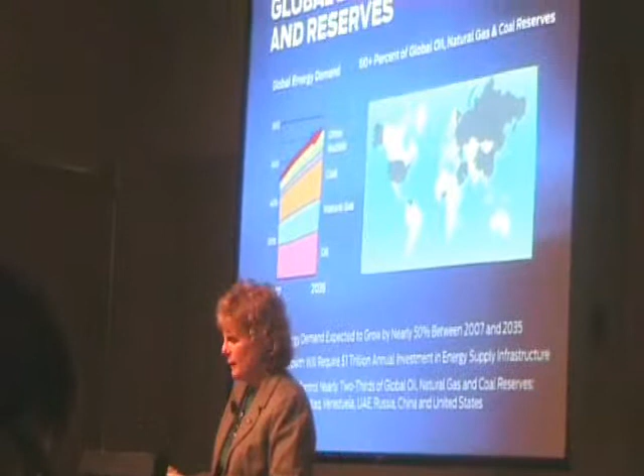And I want to ground everybody in terms of what this is all about. The world's appetite for energy is expected to grow by nearly 50% over the next 25 years. And that's going to require an annual investment of more than $1 trillion to expand the energy infrastructure. So that's something you don't really hear much about. We all know that the energy demand is increasing, but the infrastructure to support it isn't there, and there's going to be huge investments to make that happen.

Compounding this challenge is the concern that nearly two-thirds of the world's oil, natural gas, and coal reserves are located in just 8 countries: Saudi Arabia, Iran, Iraq, Venezuela, UAE, Russia, China, and the United States. So meeting this growth will require free and flowing markets. And of primary concern is that a slowdown in energy investment, to invest in the infrastructure, similar to what was experienced over the last couple of years in terms of all our financial markets and everything else, could really constrain the energy supply and hinder economic growth and reduce access to energy by low-income households. So unless the spending is done, we might not be able to get the energy where it needs to be.

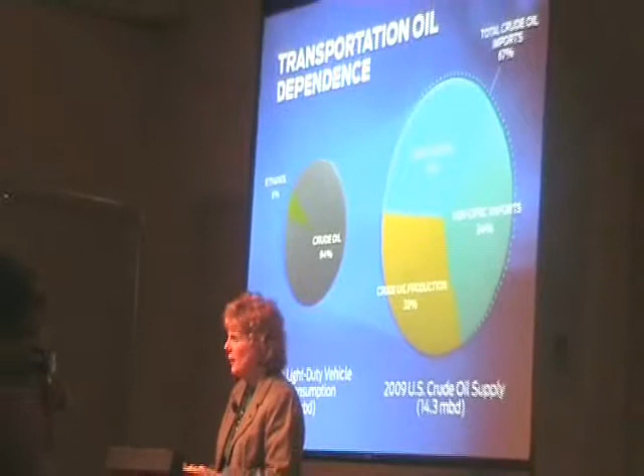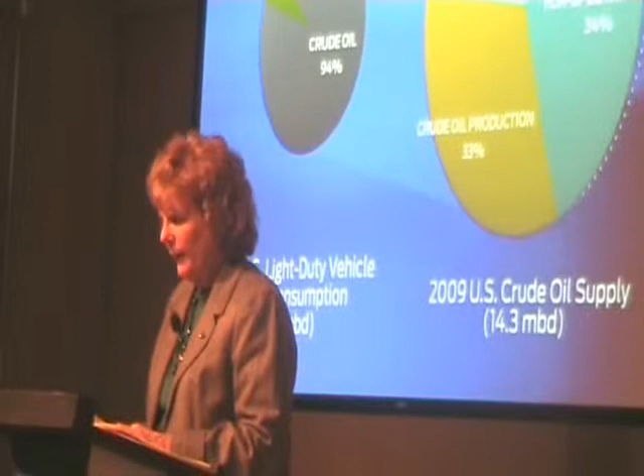So not surprisingly, the concerns over energy security often focus on the role of the transportation sector. So on the next slide here, we have what transportation oil dependence looks like. In 2009, more than 94% of the energy that was used to move light-duty vehicles across the U.S. came from crude oil, and a third of that was imported from OPEC. So globally, nearly 1 billion cars consume about half of the world's oil supply, and the OPEC countries control more than 70% of the global oil resources.

Automobiles are particularly susceptible to energy supply disruptions and oil price volatility because of the transportation sector dependence—it's really a factor in our business. So when we see the prices of fuel fluctuate, we see our sales fluctuate. Either people are trying to buy more fuel-efficient vehicles or they're less concerned about that. With those kind of numbers, it's easy to see why we're so focused on improving the fuel efficiency of our vehicles around the world.

Better fuel efficiency and alternative forms of energy, like electric power, can really make an impact on decreasing the global need for oil. That's why we've introduced the EcoBoost engine, which improved fuel efficiency by as much as 20% and decreased CO2 emissions by 15% versus our larger displacement engines, without sacrificing any performance.

And that's why we offer the EcoNetics technology. This is a collection of features designed to help customers equip their cars with technical equipment specifically aimed at greener and more fuel-efficient motoring. Features such as the Ford Eco Mode and the Smart Regenerative Charging have been introduced widely in Ford products. And that's why we're introducing a family of electrified vehicles, including hybrids, plug-in hybrids, and pure battery electric vehicles, as you heard us announce yesterday at the Auto Show news conference.

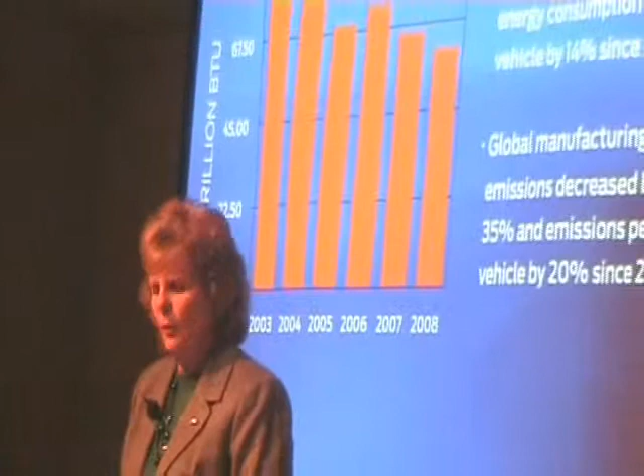And so while increasing our fuel efficiency in our product lineup will also have a large impact on energy, we're also mindful of the need to reduce energy use in the production of these vehicles. Since 2003, global energy consumption in our facilities has decreased by 29% in total and by 14% per vehicle produced. You can say, oh yeah, sure, your energy use went down, but you're making less vehicles than you used to make. We also look at the metric on a per unit basis, and so we've also driven that down. And when you consider our annual energy cost exceeded $600 million, these savings are quite significant to both the bottom line as well as to the environment.

So the added benefit is that by reducing the energy use, we've also reduced CO2 emissions by 20% since 2003, on a per vehicle basis.

But energy is not the only environmental concern we're faced with. When we talk about the need to conserve resources, we also need to consider the global concerns over water in terms of both availability and quality. I believe this is going to be the next really serious challenge. We've all been focused on CO2, but we know today 1.2 billion people globally have no access to clean water. Global water consumption has been increasing at more than twice the rate of human population growth, and that's set to triple in the next 50 years. So at this rate, the world will be using over 90% of all available fresh water within 25 years, which is just really a shocking statistic.

So globally, many regions will likely be subject to peak water, and that's the point at which the rate that water resources are being consumed is higher than the rate at which the supply is being replenished. So the energy intensity of water is also going to increase, owing to declining water quality and an increase in the distance that we're going to have to move the water from where the source is to where consumption is.

So it's clear that addressing the water challenge will require innovation and commitment. That's why at Ford we've joined the Water Disclosure Project and why we have our own water management initiative to focus on water conservation in all of our facilities and processes worldwide. It's going to take innovative solutions to deal with the water issue, which touches economic, environmental, and social concerns as well. In 2000, Bill Ford announced Ford's Global Water Management Initiative with a target of a 3% year-over-year reduction in water use.

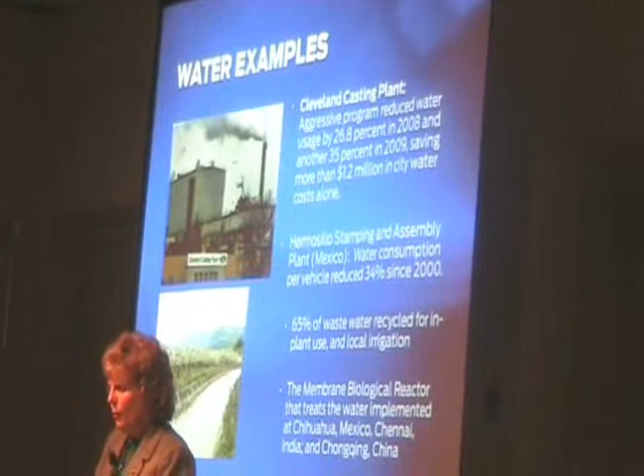We're implementing projects at our facilities to reduce their impact on water as well. For example, at our Cleveland casting plant, where we produce our EcoBoost engine, we have an aggressive program to reduce water usage that resulted in a 26% reduction in 2008 and another 35% reduction in 2009, saving more than $1.2 million in city water costs.

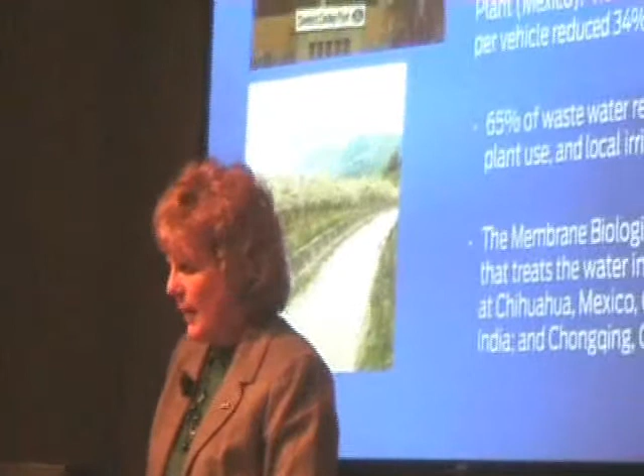And at our Hermosillo stamping and assembly plant in Mexico, water consumption per vehicle has been reduced 34% since 2000, with 65% of wastewater being recycled for in-plant use and local irrigation.

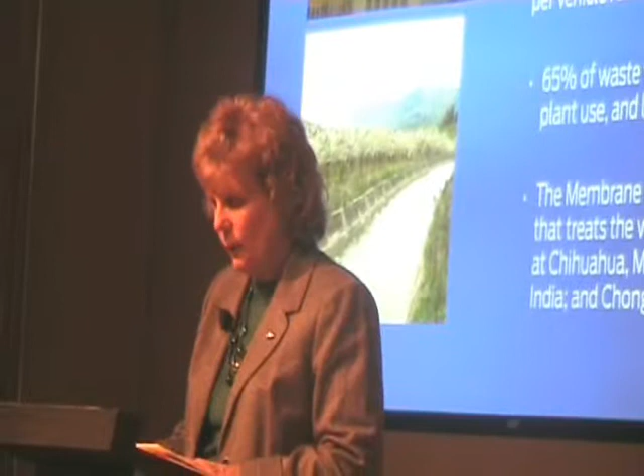This was really important to us because when we came into this area, it's pretty much a desert region, and we put in an assembly plant, which people loved because they wanted the jobs. But we were taking a lot of the water away from the people, and we said, we want to double our production—what are we going to do about the water supply? So this is the balance we have with the social, the financial, and the environmental.

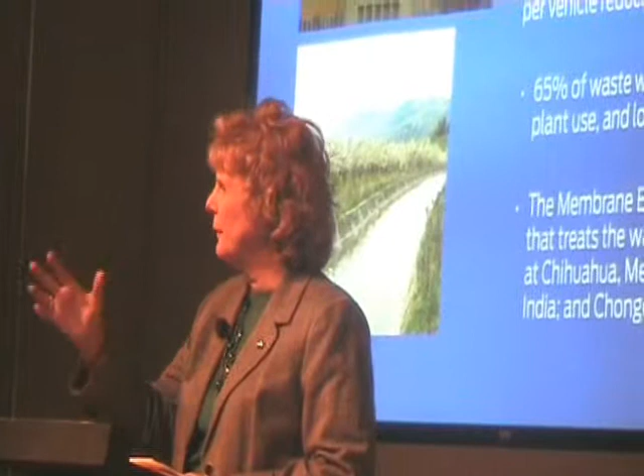We went in there and built a wastewater recycling plant, able to produce double the amount of vehicles and not use any more water—in fact, return more water to the community.

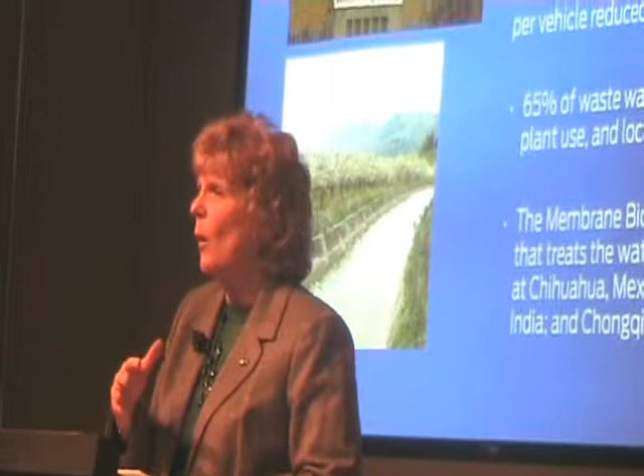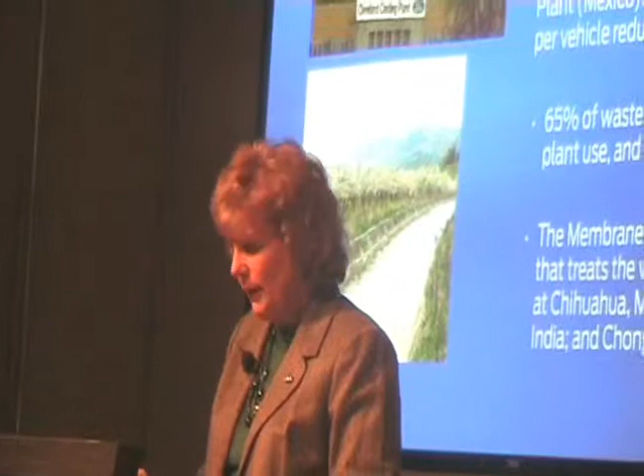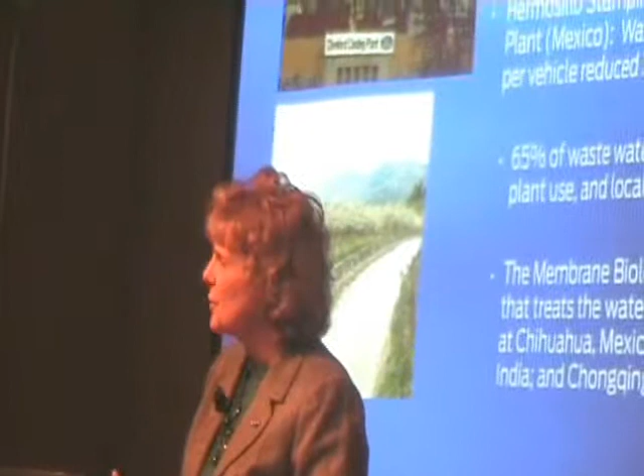We also have things like the membrane biological reactor that treats the water, which we implemented in Chihuahua, Mexico, in Chennai, India, and in Chongqing, China. This system uses an ultrafiltration membrane and a reverse osmosis process to make 55% of the plant's wastewater suitable for high-quality reuse within the plant's processes. The treated water can also be used for irrigation, bringing to 65% the amount of wastewater that can be recycled.

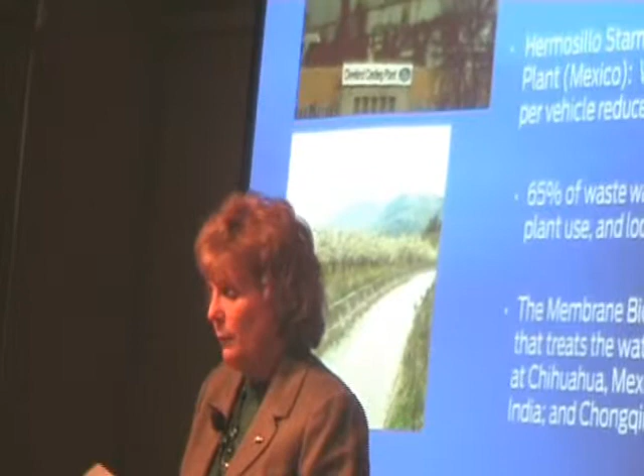Of course, the scarcity of resources is directly related to the use of those resources by a growing population, and the concentration of that growing population in specific areas—what we call megacities. These are cities over 10 million people, and the proportion of the population in urban areas worldwide is expected to rise from 48% in 2003 to over 61% by 2030. That's 2 billion more people living in urban areas.

By 2015 alone, 4 more megacities will develop in Asia, bringing the world's total to 23. We're also seeing the development of mega regions and mega corridors. For example, the corridor connecting Hong Kong, Shenzhen, and Guangzhou contains more than 120 million people, and this growth is putting unprecedented pressure on our transportation networks.

Clearly, the model we have in the U.S., where nearly every licensed driver has a car or two, isn't going to work in these very crowded regions. So funding for transportation infrastructure is going to be a big challenge, and concerns over air pollution and congestion will only be exacerbated.

Quite frankly, as we sit here today, we don't have a solution for the transportation dilemmas we find in the megacities. But we're actively engaged in understanding the issues to find these solutions. We believe that intelligent transportation systems are going to help by using a variety of transportation modes and helping people connect to those modes.